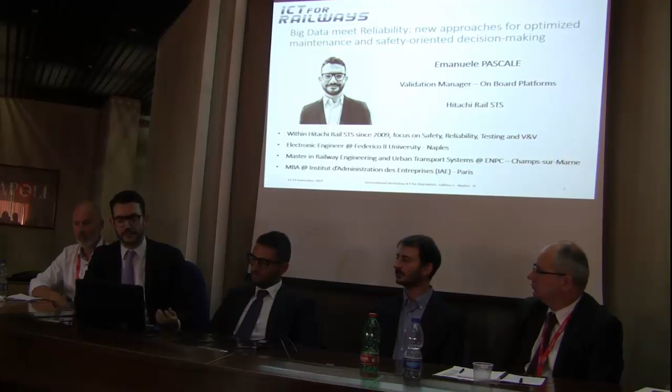My name is Emanuele Pascale. I work within Hitachi STS since 2009. My main focus has been safety, reliability, testing, V&V. I have spent almost 8 years in France. Basically, I'm an electronic engineer. I have performed further studies, and this presentation is the wrap-up of some of the publications that have been done in collaboration with some French organizations.

In this presentation, we're going to discuss how reliability can leverage big data. We know that nowadays each industrial domain seems to be affected by a revolutionary innovation that aims at increasing the quality of life. We are searching for autonomous trains running 24/7, autonomous planes, self-driving cars. The key common aspect that brings together all these innovations is reliability.

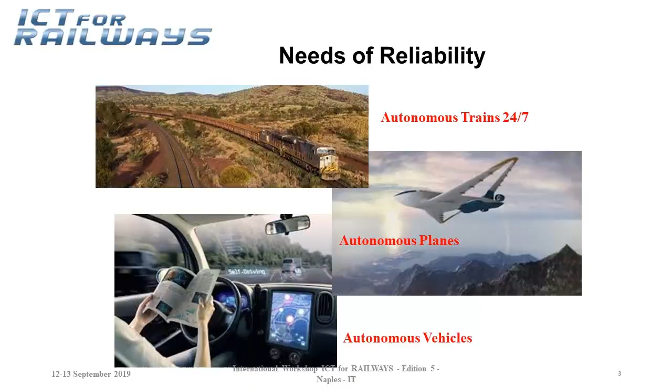Nice one, Samsung. So you have to understand that the cost of unreliability may be very heavy. For example, in terms of marketing, because after 3 years of this event, you still remember the name of the company that was faulty on this aspect. If you take the progress of the stock on the market, you see that the day Samsung stopped production of this phone, stocks fell 8% in one day. So there is really a cost related to unreliability.

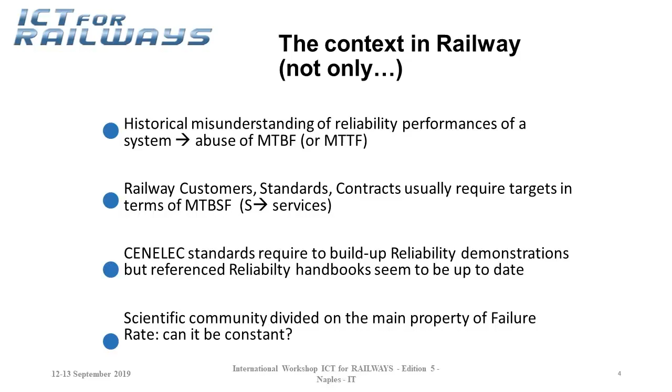The context in railway is the following: there is a historical misunderstanding related to reliability performance of a system. If you take a data sheet of a component and search for the reliability section, you will often find one parameter, MTBF or MTTF, like a mythological parameter that aims at describing the reliability of a system.

Even from a standard point of view, from a customer point of view, there is a request in terms of performance described by MTBF or MTBSF, where S means services. So we don't want our train to get stuck on a line, but we translate it into a figure. Even CENELEC standard required for reliability demonstration is something where all the parameters are left to the constructor that has to perform this demonstration. There is no clear way, but it's something mandatory with respect to what CENELEC requires.

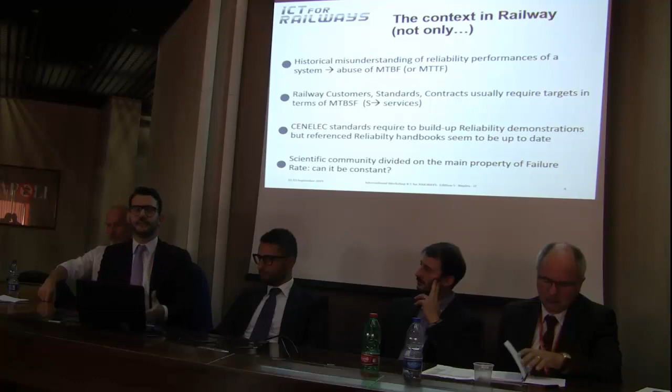Finally, there is a scientific community divided on one of the main properties of the failure rate that is related to the MTBF: can the failure rate be constant? When we say the failure rate is constant, it means that if you take your system at T0, the way failures occur over time is the same whether you take the picture at T0 or after 10 years.

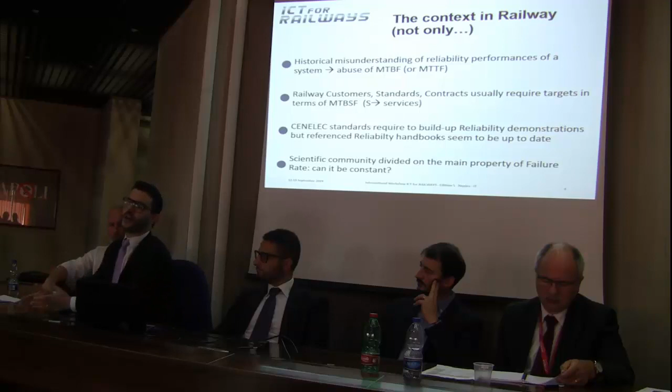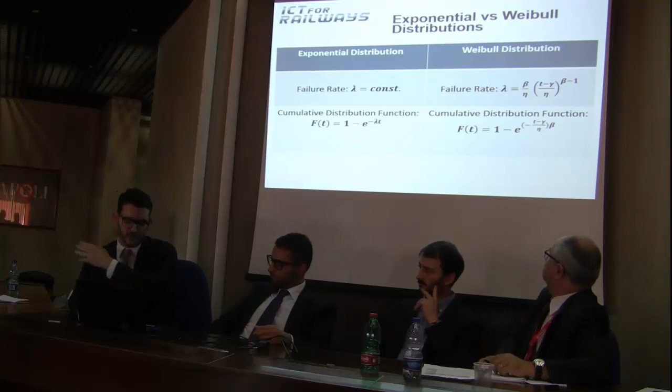From a technical point of view, I have depicted two ways of describing this problem. One is the exponential distribution, the fact I was talking about - we say the failure rate is constant over time. You can also use a more complex system in which the failure rate depends on more parameters. In this case, I have put on the slide a Weibull distribution, but it's not the only one - there are plenty of reliability distributions. What's interesting is that in one case it's constant, in another you have to put your attention on the beta factor, because we will discuss this after.

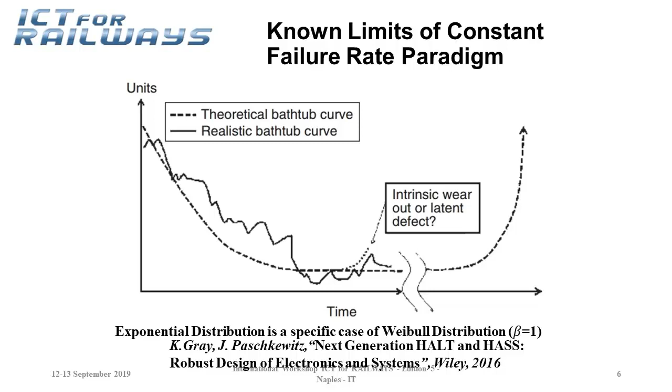Given the known limits of the constant failure rate paradigm, you can look at reliability over time. Classic reliability of a system follows the path of a bathtub curve: reliability increases at the beginning of your system because you have to tune your system and deal with quality side effects. Then you have a period in which the failure rate is constant, and after that your failure rate increases because your system is aging.

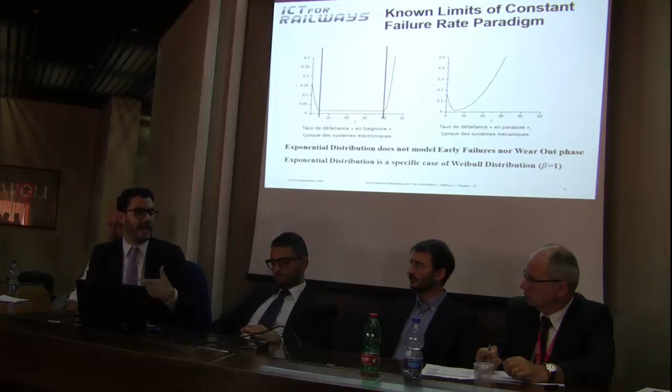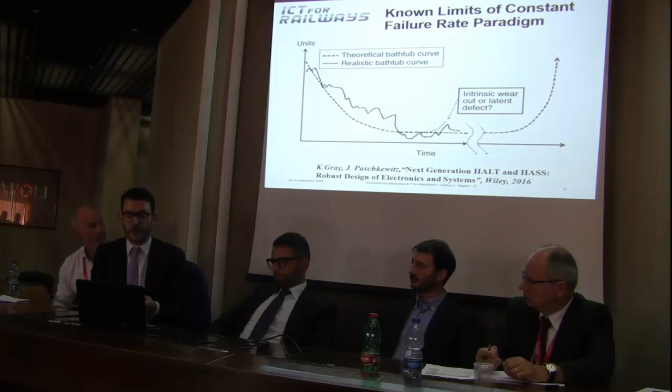But in reality, things are a little more complicated than theoretical models. When you measure an increase or decrease in reliability - so an increase in failure rate - is it because your system is getting old, or is it because you have intrinsic wear out or latent defects?

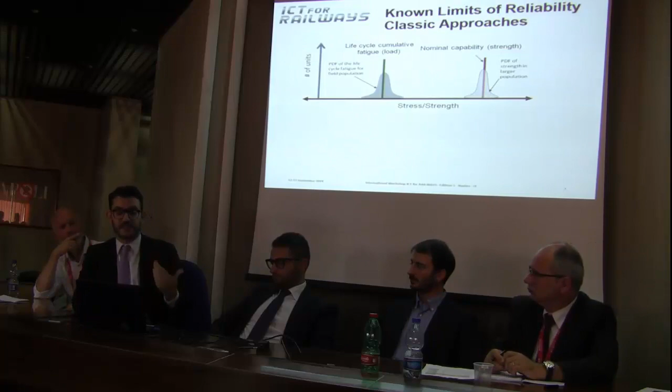When speaking about reliability, each system is designed in a way that you know the limit your system has to comply with, and you take some margin. This margin is the difference, the distance between the green bar and the red bar. You have to know that these two bars actually have a distribution, and this distribution can vary over time. You experience failure when these distributions meet.

The reliability data references used in CENELEC standards have trends that start 60 years ago with the first reliability data set, the Mil Handbook, which was in a military context and based on constant failure rate bounding. Since it was the first pillar of reliability, all the other reliability data references that came after have imitated this kind of behavior until nowadays, where the recent version of the CENELEC standard keeps citing these data references.

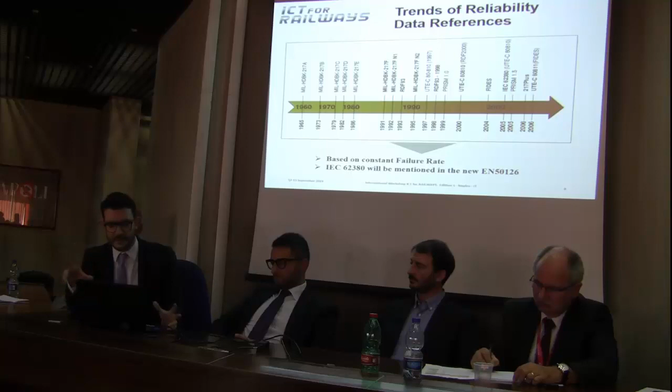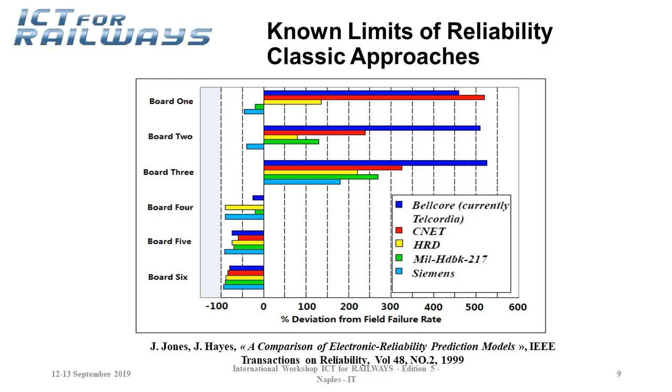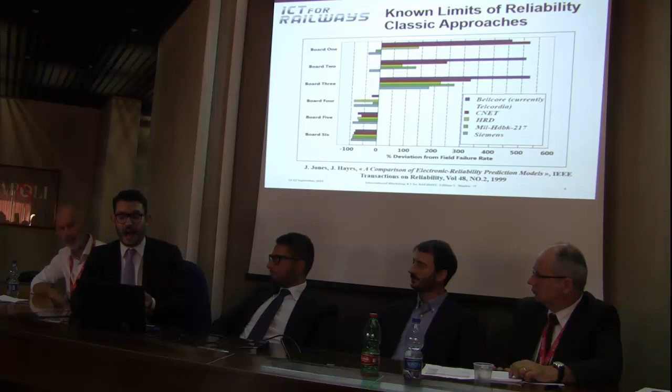The fact that there are doubts about whether MTBF or failure rate can be constant over time has been somehow demonstrated at the end of the 90s, where Jones and Hayes took six different boards with different kinds of technologies. They tried to apply this reliability data set and measured the deviation from field behavior, and they discovered there is a lot of variability. So the question is, are these data references representative?

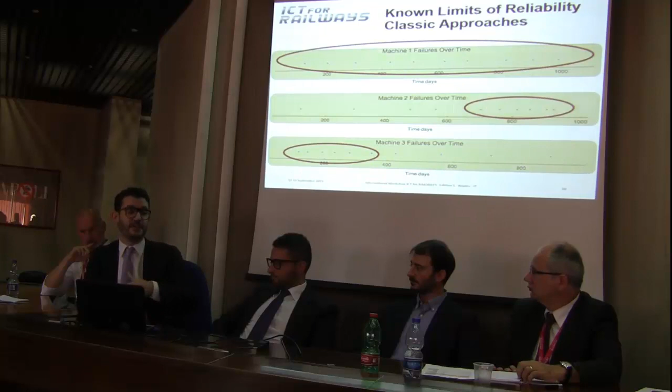To understand the limits of this approach, you can take three equivalent machines. One of them experiences failures over a given time in a random way. For another, the failures are at the end of the observed period, and for another, they are at the beginning. If you make the calculation according to the standard approach, you find that the MTBF is the same, but looking at this figure, you understand that the physical representativity of the failure is not the same.

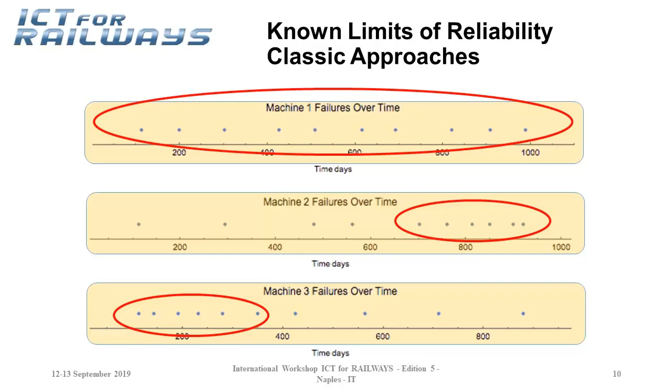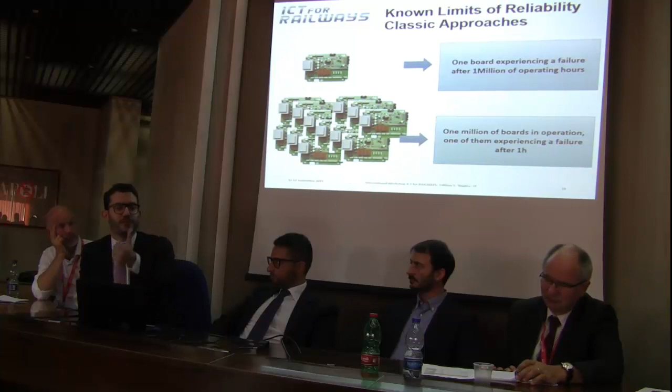Another limit: if you take one board running for 1 million hours and it experiences one failure, it has the same MTBF as 1 million boards running for 1 hour each, where each of these boards is experiencing a failure. So they have the same MTBF, but you understand that things are speaking differently.

Okay, this was the previous exercise. I took this slide at the beginning, so this was the famous mobile phone that exploded, and this is the minus 8%.

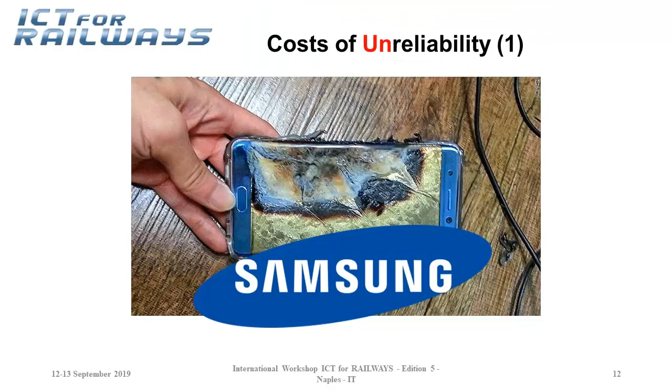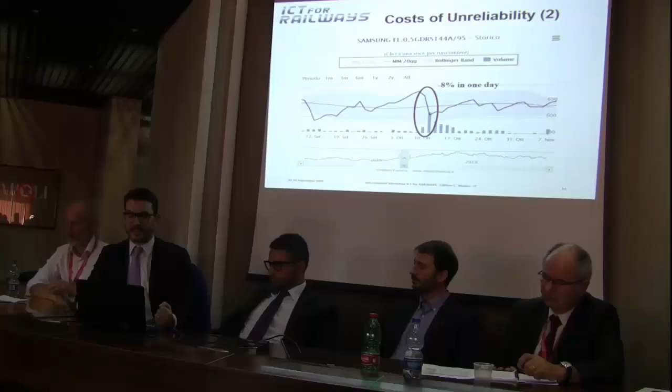The idea of the approach I discuss here brings together reliability and big data. It is based on field return data, so in order to build up a more complex reliability distribution, you need real data, instead of a static model associated with the classic approach.

When you try to face this new wave of models, you have to deal with some limitations. One of them is the problem of censoring. The colleagues were speaking before and they said big data is sharing. Yes, big data is sharing, because if you want to build up your models using only the information you own as field return, there will be a strong problem of censoring. Data about failures have to be shared by construction, by operator, and by industrial provider. This is also related to the availability of data, because what is the instant in which failure occurs? Is it the instant the system goes off? Is it when the operator will communicate it to you? Is it the time in which you are measuring it? You don't know. So there is censoring.

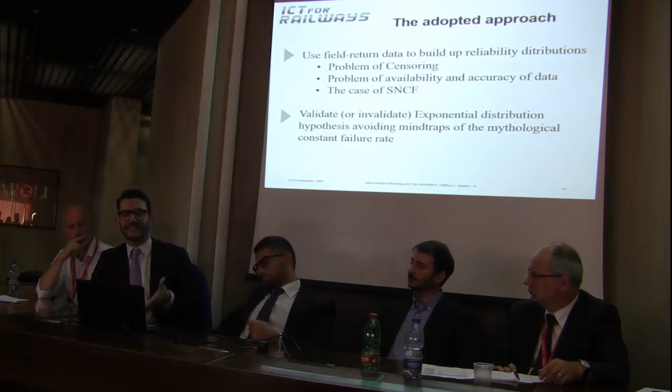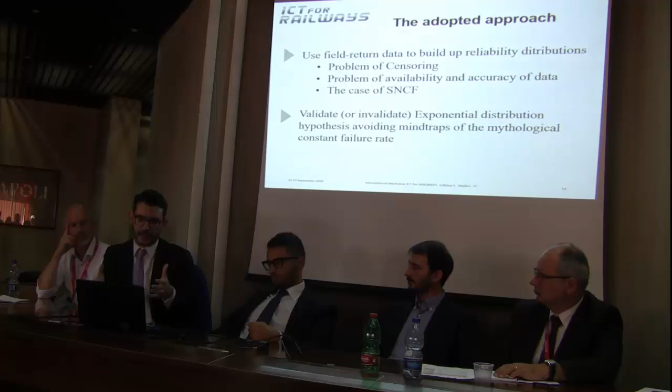To go on, we can say that the classic model can be seen as a particular, specific case of a more general and more complex distribution, such as the Weibull one. To build up a reliability model based on Weibull, you need the failure data, and you have to plot it over time on a Weibull chart. You are then able to calculate the famous beta I was discussing before. The beta will tell you if your system is at the beginning of its life, or in the middle of its life, where we are in the context of constant failure rate, or if it is experiencing wear out.

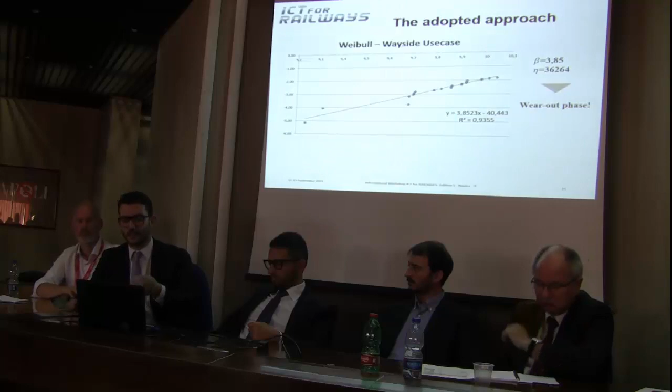In this case, it has been stressed to show that you can have cases in which the beta is very high, greater than 1, so you are experiencing wear out.

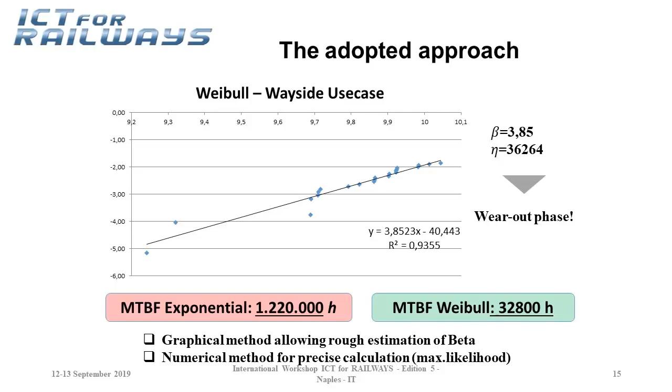And if you want to bring back to the MTBF figure, because everyone seems to speak only this figure, you understand that in case of exponential distribution, MTBF is more than 1 million hours. If you report it to Weibull, you have just 32,000. So there are 2 orders of magnitude between the 2 figures.

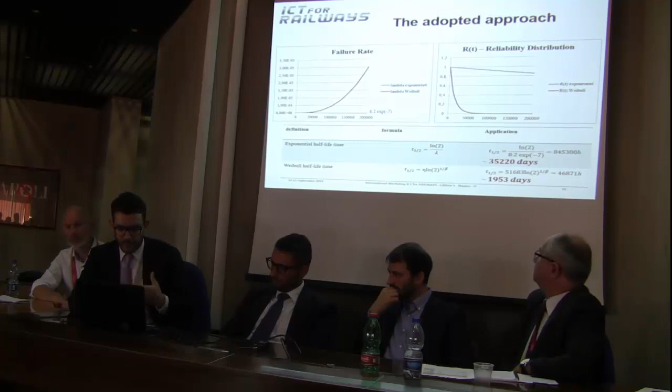There is a way, so once you have been able to collect this data, there is a way to build up a complex model, to enhance, to have preventive maintenance tasks tuned. This must be done including the cost of a system.

So you know that there is a cost related to preventive or corrective maintenance, the fact that you are replacing your board. And you have the consequence, the cost of the consequence of your failure. So there is a sort of arbitration between: do I wait for the system failing, or do I anticipate and replace my system?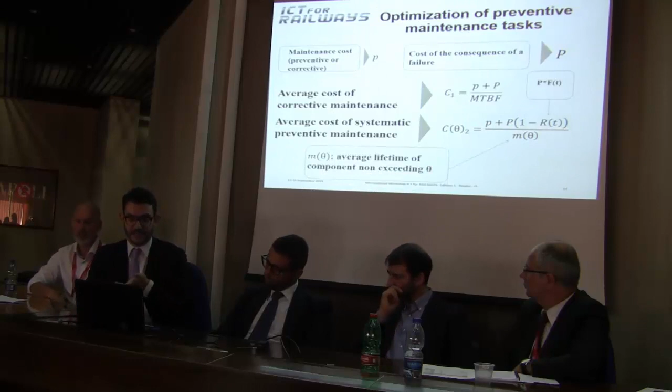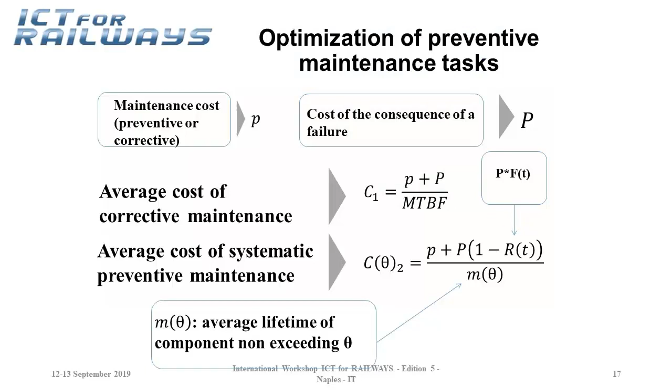With some formulas, I don't want to bother you with the formula, but you can easily calculate the average cost of corrective maintenance and preventive maintenance. You can make a ratio, so you can say that if the cost of preventive maintenance is less than the cost of corrective maintenance, I need to replace my system instead of waiting for my system failing.

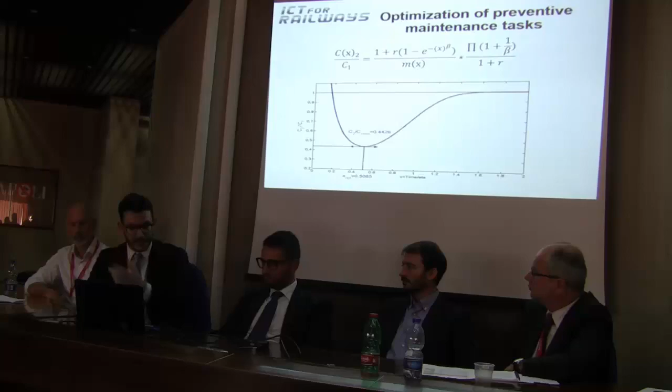So from a mathematical point of view, you can calculate the minimum of this function and identify what is the best time, best moment to replace your system.

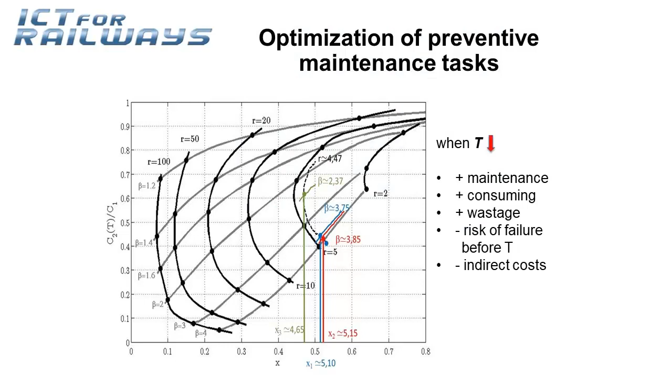Of course, as I told you before, you need to bring with you the relevance of the cost. Because there might be some cases in which your system is experiencing wear out, but the cost of the failure is not important. There are some cases in which you need to understand you need to replace your system because the cost of the failure will be very important.

This is a case in which customers require penalties for unavailabilities, for example. And I knew recently that on some lines in France, there are also indirect costs that are reported to the provider, meaning that if a train got stuck on a line, all the costs for food, hotel, and so on for the people that are on the train can be brought back to the provider of the signaling system. So you have to take care about that.

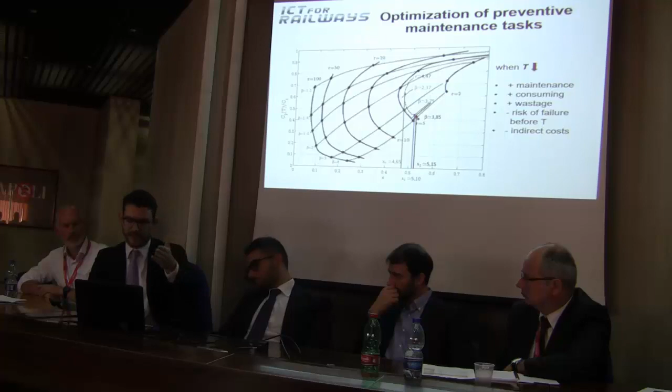When you take all the minimum points, so you can fix the cost and provide the beta, or you can fix the beta and provide the cost, so you can have this kind of plot. And once you have collected the data about the behavior of your system and you know what is the cost, you can understand what is the optimum time to perform the maintenance.

Of course, when you move on the left of this graph, you are increasing tasks of maintenance, you are consuming more boards, you are wasting more, let's say, useful life, maybe enhancing or increasing the time and the way you perform maintenance tasks, but you are reducing the risk of a failure before the time, and you are reducing indirect costs.

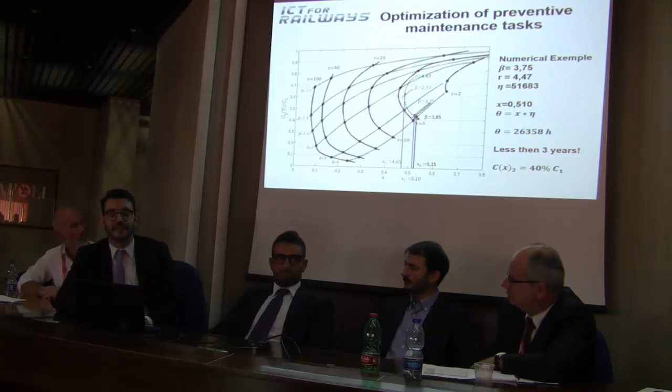So there is a numerical example for the ones that are interested. So you have systematic preventive maintenance that, according to this calculation, has to be performed every 3 years.

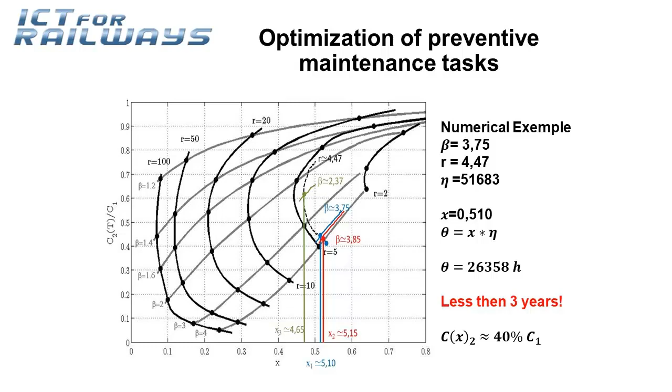To conclude, in order to have the maintenance optimization, you have 3 pillars. You have to rely on complex reliability models instead of simple ones that are related to historical reasons, as I explained before. So you can adopt Weibull distribution or more complex models. You have to adopt more parameters than the simple MTBF.

You have to rely on big data, so you have to optimize the logbook of the after-sales department, and you have to share information with the operator about failures.

You have to think about your system in an intelligent way and in a proactive way with respect to reliability, in the sense that your system has to be able to collect relevant data. One of them is the total working time, how many times the system has been operated.

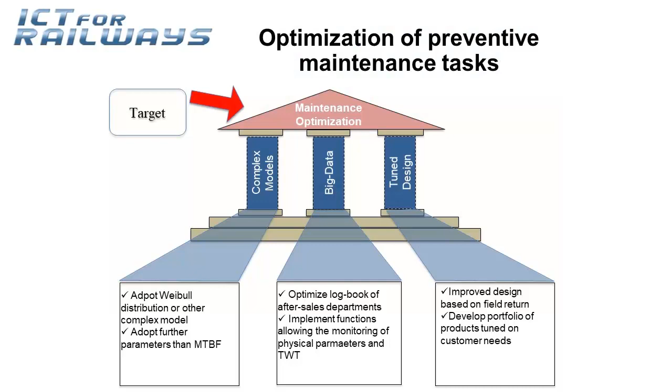And finally, with a look-back feedback, you can improve the design of your system, and you can tune and have a portfolio of systems that is deployed and tuned to the needs of the customer.